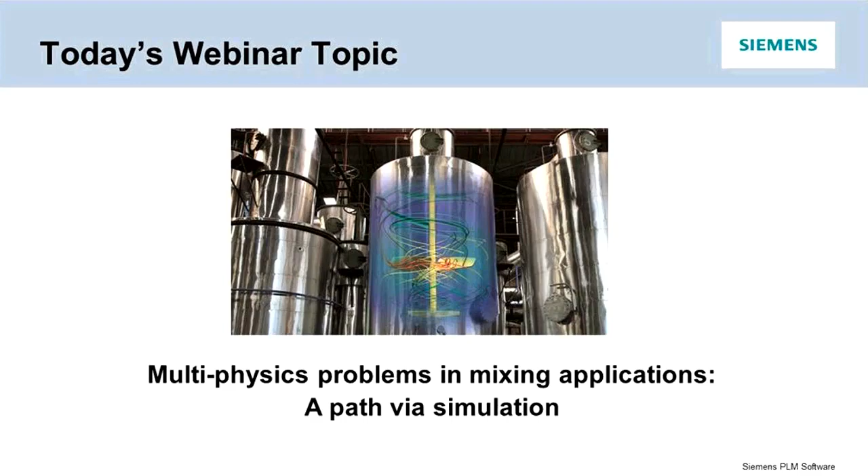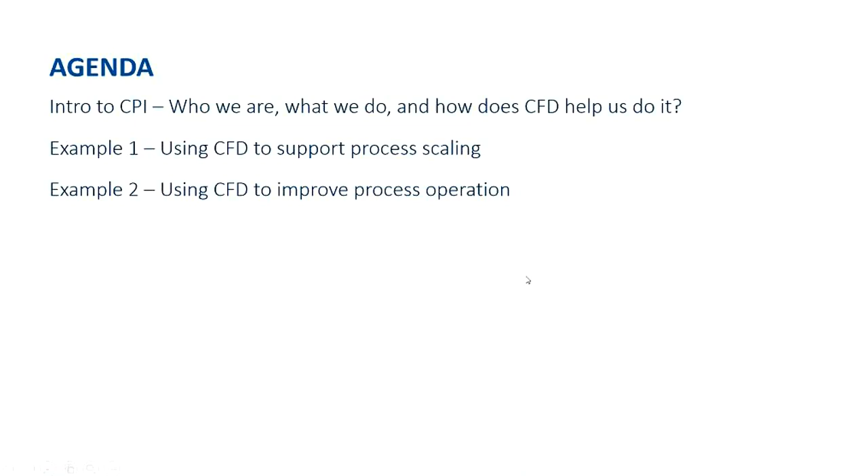I'm going to give you a quick rundown today of essentially how we use CFD to support process development and scale up. So just a bit of a quick agenda: I'll start off with a quick introduction to CPI, who we are, what we do, to give some context to the examples that follow, and then there will be two examples. So, who are CPI?

We are an independent, open access technology innovation centre. We were set up by the UK government around 14 years ago to help companies scale up and develop their new and novel processes. So we sit in this space between invention and industry, and we basically exist to help people bridge that gap.

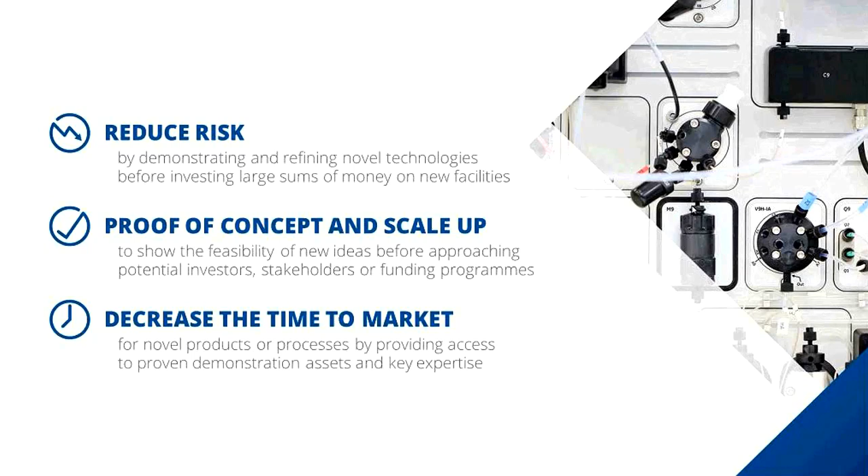So how do we do that? We have a variety of experienced scientists and engineers who've spent years and years scaling up processes. We also have a whole load of pilot and demonstration scale assets as well. What a lot of companies find is that some outrageously large percentage of good ideas tend to die in the scale up phase, purely for financial reasons, for lack of the ability to get hold of the kind of scale of assets you need to prove a process. That's where we come in.

We have four national centres: the Printable Electronics Centre, the Industrial Biotechnology Centre, which is where I work, Biologics Manufacturing, and the National Formulation Centre. Each of these was set up to assist the development of a particular industry within the UK.

So in terms of specifically CFD at CPI, how do we use it, what do we do with it? Mostly for us, it's about generally getting a better understanding of what's going on inside our vessels. That can be in the form of troubleshooting, when something isn't behaving quite as it should. You can't necessarily figure out why just by looking at single point instruments or through sight glasses. What CFD helps us with is seeing in much greater detail what's going on inside our vessels, to help narrow down what the issue might be.

Process characterization and optimization as well - for an existing process, how can we make it better within the limitations of an existing piece of kit? Process scaling is one of the examples I'll give a little later on. That's one of the main things we do: essentially trying to move people's processes from laboratory scale, in a flask of one litre or less, up through to an industrially relevant scale. So how can we use CFD to support that by better understanding the performance limitations that come with scale, and then design and operational guidance as well, and virtual prototyping.

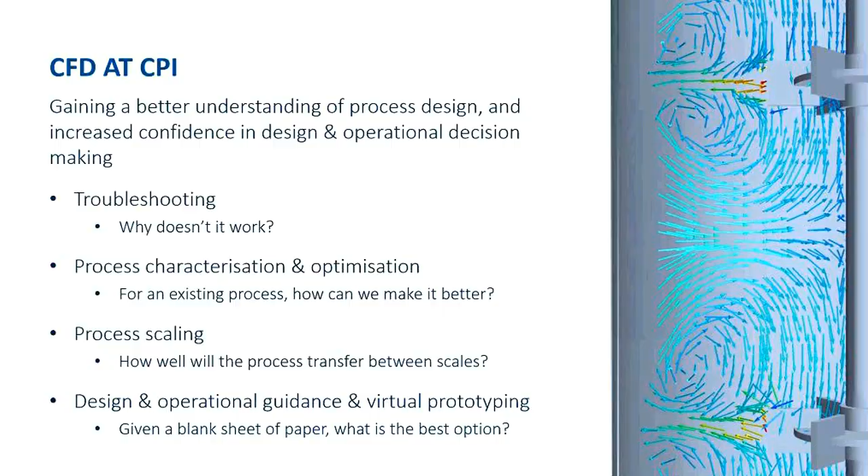Okay, so the first example I'll go into here is about using CFD to support scale up and also scale down. I'll just introduce that concept of scale down, because it's a big part of how we operate here.

We have a variety of assets, as I mentioned earlier on, from milliliter scale fermenters right through up to 10,000 litre scale. And what we need to do is to help our customers understand the limitations of the larger scale operation, without actually having the cost of running at large scale.

So what we try and do there is to find ways to operate small scale vessels in a way which mimics the performance of large scale vessels and the limitations of large scale vessels. So we can help companies to do all of their risky experimentation at small scale cheaply, but in a way which is relevant to large scale.

One of the main issues we come across time and again is people bringing in processes which have been developed in the lab using lab scale fermenters which are running flat out, which is just unfortunately not representative of larger scale operation.

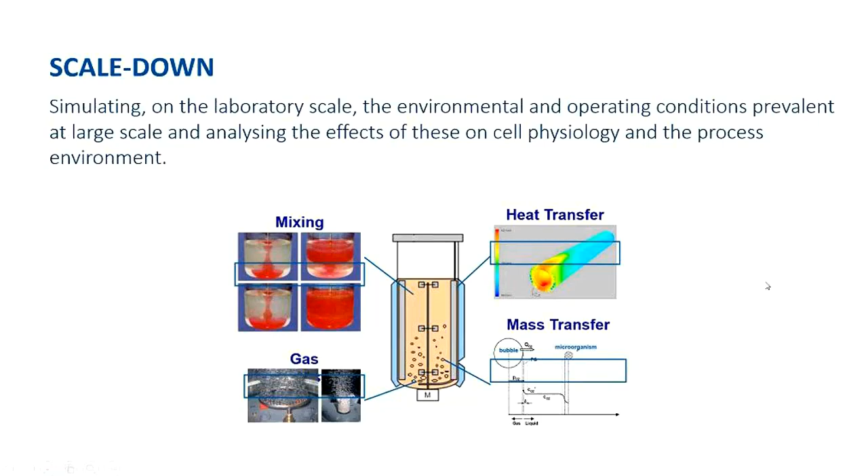Okay, so just to introduce the concept of using CFD to assist with process scaling, I'll use a very simple generic example to start with. So if you're designing a stirred tank reactor on paper, there are a variety of traditional rules which you would use when it comes to either the physical design of your vessel, or the operation as well. For example, with your physical design, your impeller should be 1/3 of your tank diameter. You should have 4 baffles, and they should all be 10% of your tank diameter.

Things like this, and the same comes to your operation as well. I've just listed a few here. To match mixing performance, you should match the impeller tip speed. To match solids distribution performance, you match energy input, and so on. These are well-established rules which have been used for years and years, and people tend to trust them.

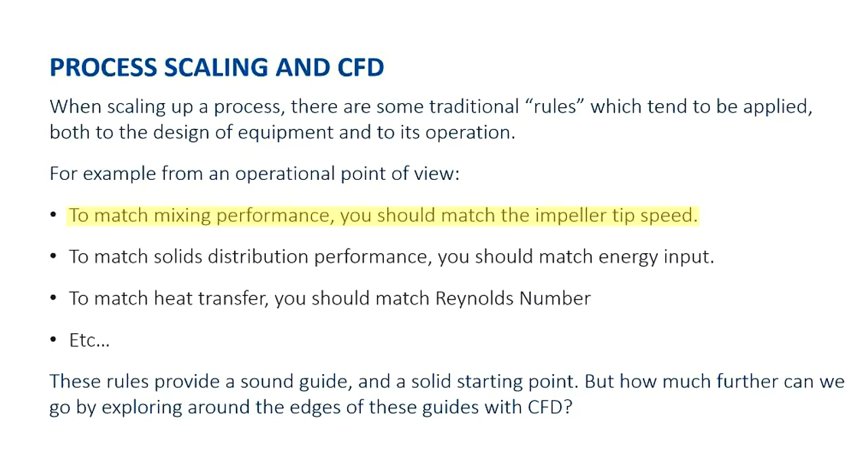But what we'll do here is a little exercise in using CFD to check these rules, but also to see how much further we can go just by exploring around the edges. What I'll pick on here is one particular example: to match mixing performance, you should match the impeller tip speed. I've got a very simple example here where I have two vessels which have been perfectly geometrically scaled. Essentially, I've just taken a 500 ml vessel and stretched it in all dimensions equally to make it 5 litres.

At the start of the video here, both vessels are stirring at 500 RPM. You can see we've got the turbulence profile shown on both of them. What I'll do is gradually increase the speed on the right-hand side until the turbulence profiles are the same. That, in theory, according to those rules, should be at the same tip speed. And what we'll find is, when we get up to speed, we are around about the same tip speed, but not exactly the same.

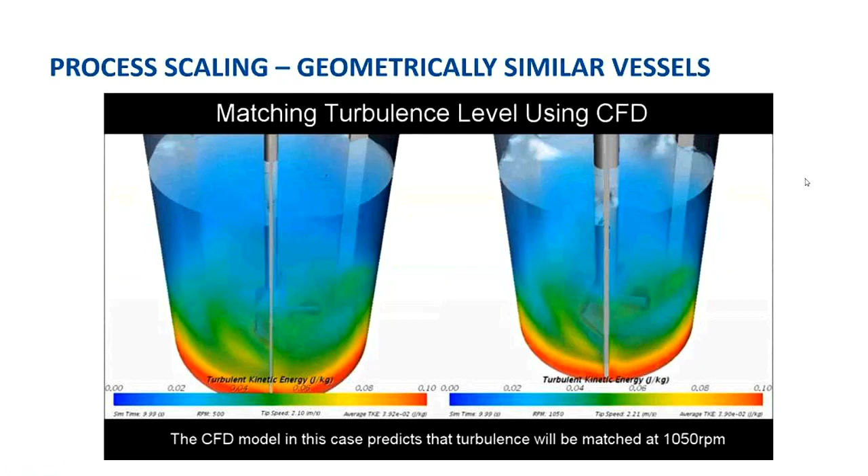So what this shows is that the model is generally in agreement with these traditional rules which everyone's trusted forever. However, what it is showing is that in the smaller vessel we need to go slightly beyond the same tip speed in order to get exactly the same turbulence profile. So that's all well and good, but how often do you have places which have perfectly geometrically scaled vessels? We find that's quite rare.

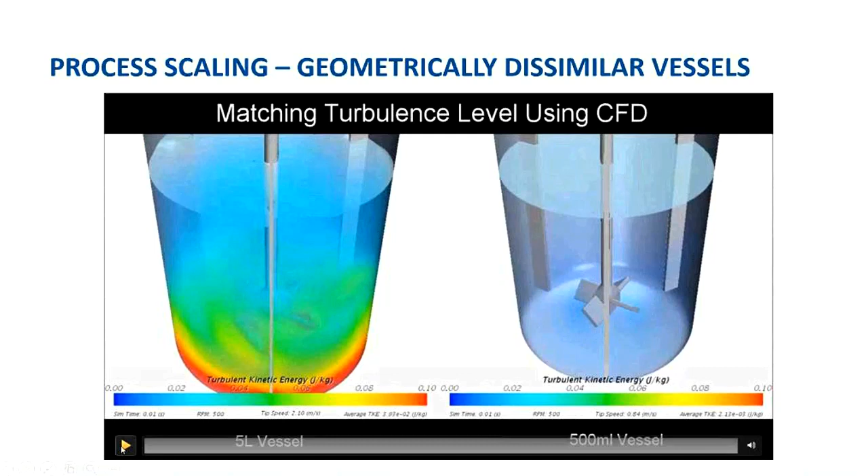What we end up with normally is people who have a research lab with a variety of different vessels in there. So here is the same example again, except on the right hand side we've got a disproportionately small impeller. If we do the same exercise again, speeding up the agitation on the right hand side until we have as close as possible the same turbulence profile, what you see is, because they are not perfectly geometrically scaled, these rules just go out the window, and we need to go way beyond the same tip speed in order to get the same turbulence and the same mixing performance.

And for us, this is where CFD comes in really handy, particularly when it comes to comparing our small-scale vessels against a customer's small-scale vessels to try and mimic the performance that they were getting in their labs, in our labs, as we transfer the process in.

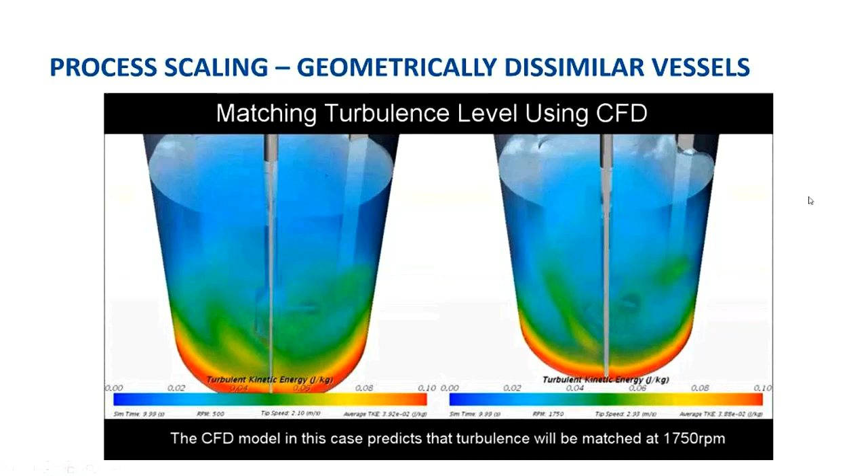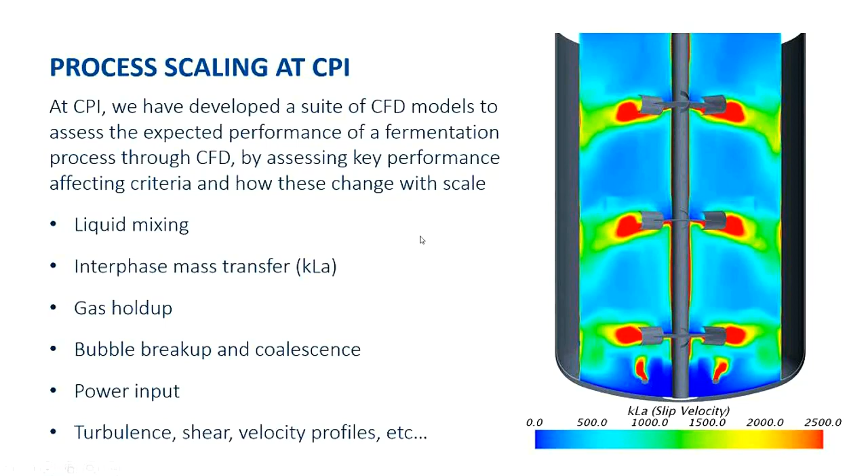So how does this apply to, how have we generally applied this approach here at CPI? Over the last 6-12 months or so, we've developed a suite of CFD models looking at the performance of all the different scales of fermenters we have here, from the point of view of various key performance criteria that come with fermentation processes, so liquid mixing, KLA and mass transfer, gas holdup, bubble size, and so on.

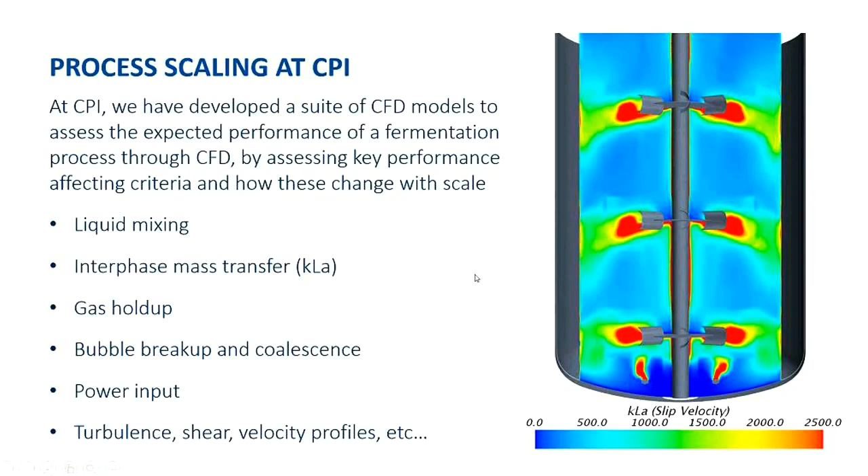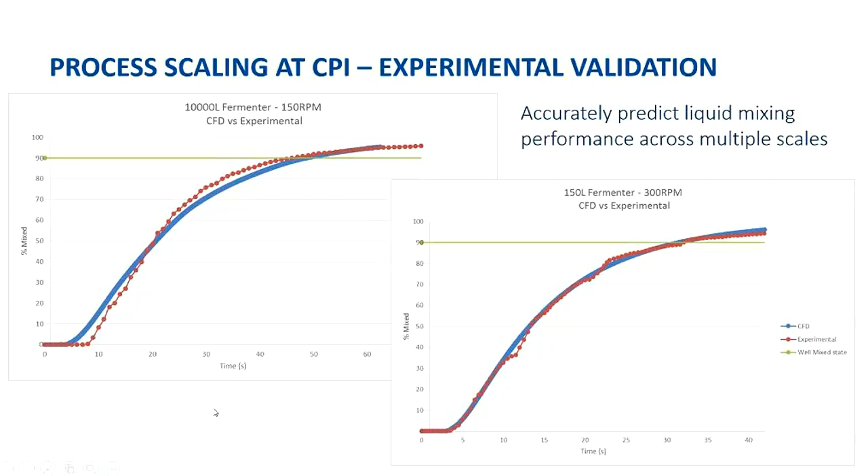So we can do all of our experiments at 10 litre scale, where it's relatively cheap on materials and labour and things like this, get a really good understanding of how the process is going to work, optimise the process at that scale, and then in theory just scale it straight up to 10,000 litre scale and it'll just work.

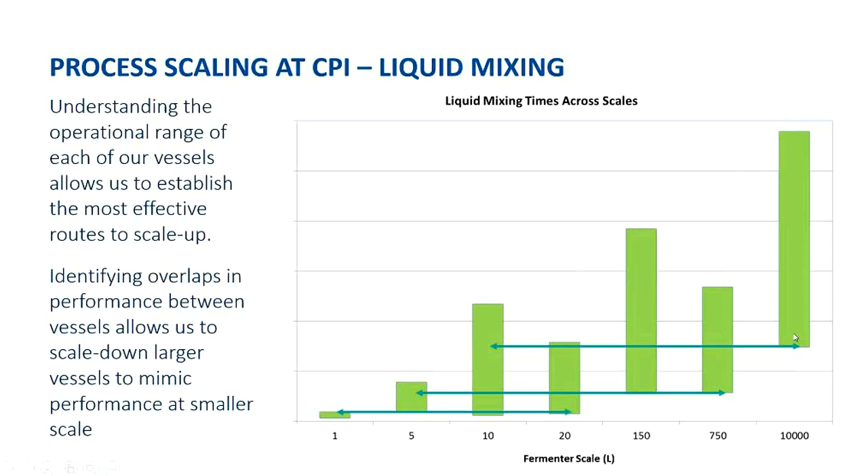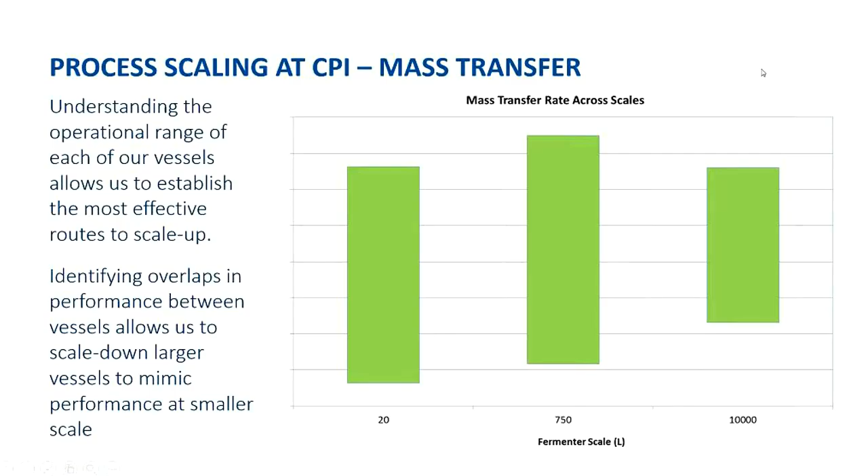The same applies to KLA and mass transfer rates, same kind of exercise. So that was just a brief introduction to scaling processes and how we can use CFD to support that. What we've got here as well is an example around getting the best out of a single piece of equipment. This is about how to wrap our heads around the limitations of operating at very large scale.

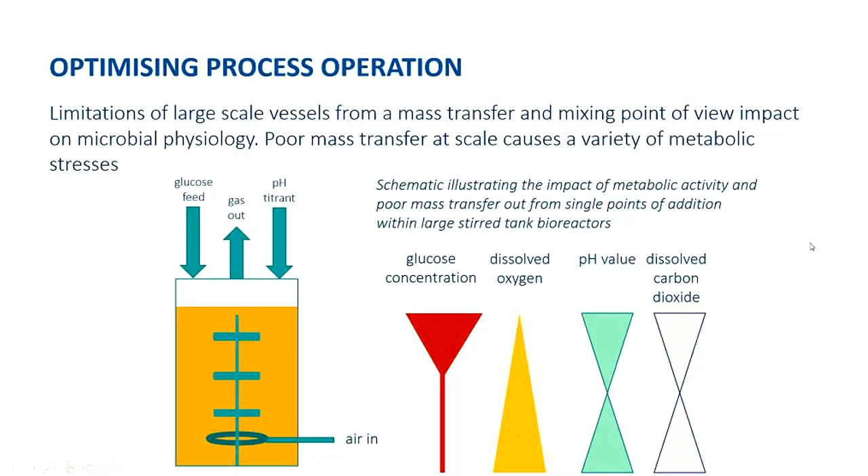So what we wanted to know is, we wanted to have a look at our larger scale vessel and really understand what is the best way we can operate this to get the most possible mixing performance out of it.

So what we did here is a series of mixing time models, with a tracer added in at the liquid surface at different levels, and we monitored the concentration profile of that and the uniformity of that over time in various different mixing zones.

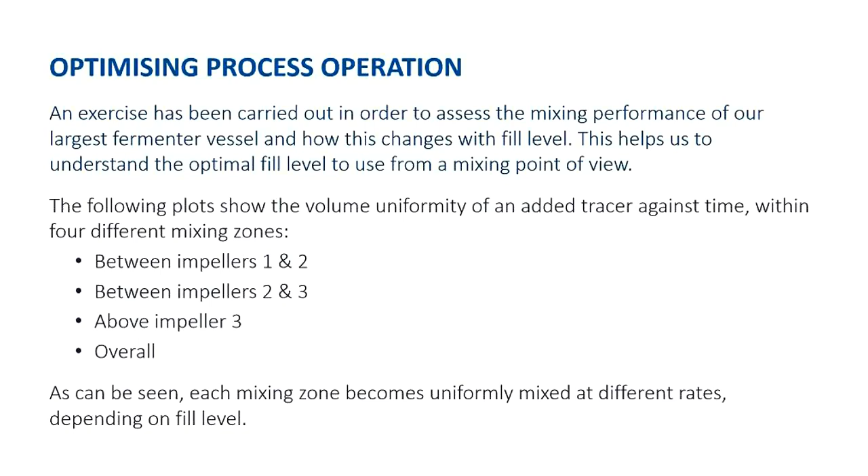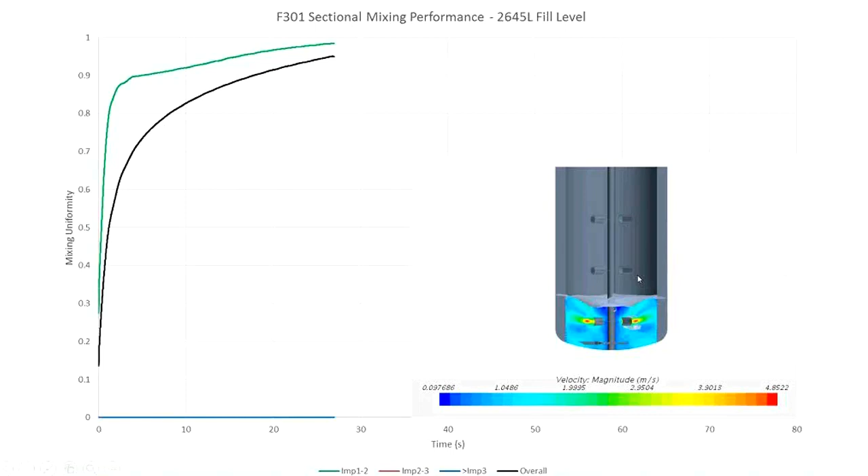We saw some quite interesting results from this. This is a similar plot to what I'd shown before, which is the mixing uniformity, or volume uniformity, of the concentration of the tracer over time in various different mixing zones - between the first and second impellers, between the second and third impellers, above the third impeller, and then overall throughout the full vessel. We see some quite interesting things here. This is a liquid level roughly in the middle of the first and second impellers. If we fill the level a little higher, what you'd expect is there's more fluid, so it will take longer to mix, but what we actually see is it takes less time to mix.

This would be quite difficult to explain without the CFD model behind it. If we look at these plots here, we have a nice recirculation pattern generated here, but if we pull the level back down again, we actually don't get this recirculation pattern. So what happens here is in between the impellers, at a larger fill volume, we actually have a better mixing performance.

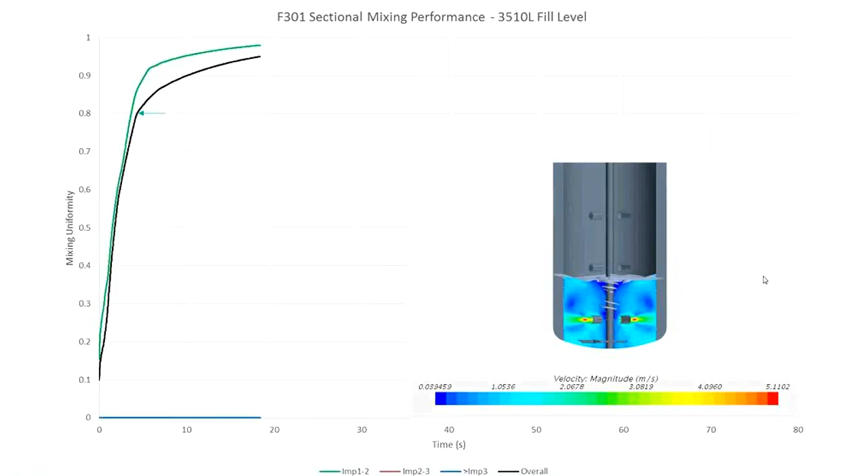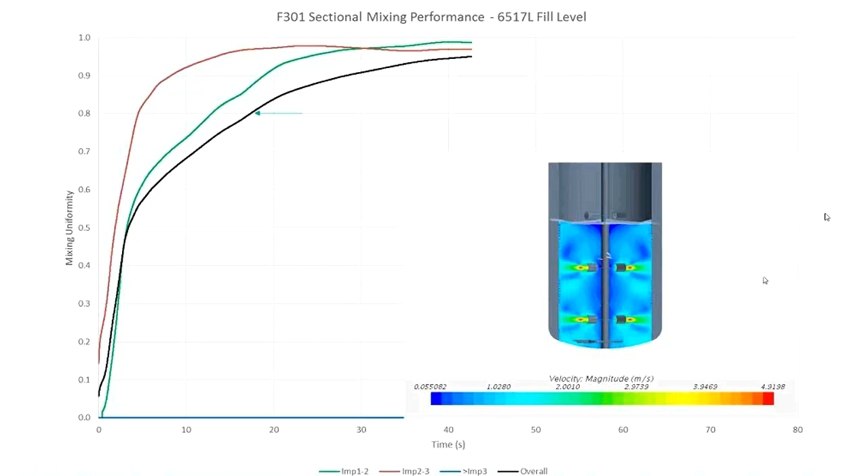If we fill up further and introduce the next mixing zone, you can see the time extends out, as you would expect, as we brought another zone into play. But then again, the same applies if we increase the level within that zone. It actually pulls the mixing performance back again, because we have an opportunity to create a nice recirculation pattern there. And then again, as you'd expect, as we go up to the top, we see everything go out again because we're introducing another mixing zone.

What we see here though is actually the mixing performance within each of the three zones, which would be very difficult to measure without the use of CFD. We see here that the top zone mixes quite quickly, and the second and third zones mix at essentially the same rate, just offset by a period of time, which would be the time it takes for the fluid to actually make its way down there.

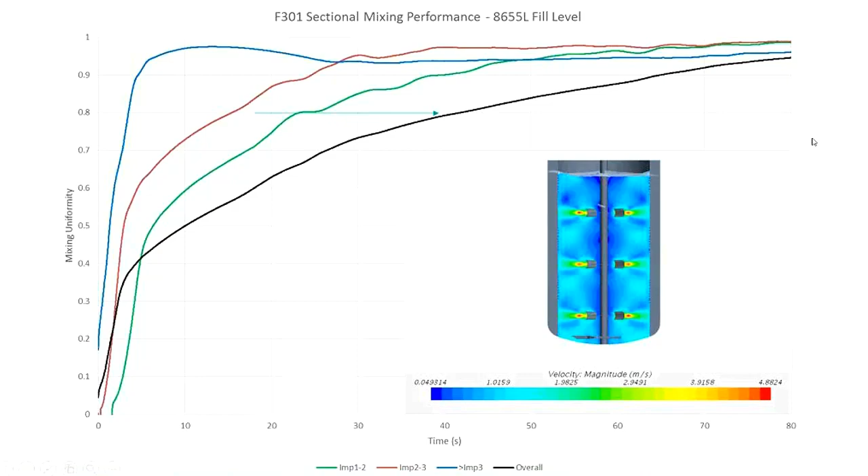Okay, I think there we go. We got there in the end. Okay, so basically that was it. Just a couple of introductions, a couple of examples of how we use CFD to support what we do here at CPI, and that's me.

So yeah, also a warm welcome from my side, and I would like to start with a summary of some trends we see in the chemical and process industry based on our interaction with our clients.

First of all, there is a need to improve the performance, mainly with a goal to increase the throughput. Secondly, we see a trend to more flexibility. This can be either with respect to the feedstock for a certain process. So if you think, for example, we see a certain transition from carbon-based chemistry to green chemistry. But it can also be with respect to material variability, which means that smaller batches are needed to produce more customized products.

And this often takes place in the same reactor. And finally, and this is probably always true, we want to reduce costs by, for example, reducing the power consumption for a certain process, or by doing fewer expensive tests, or indirectly by reducing the time to market.

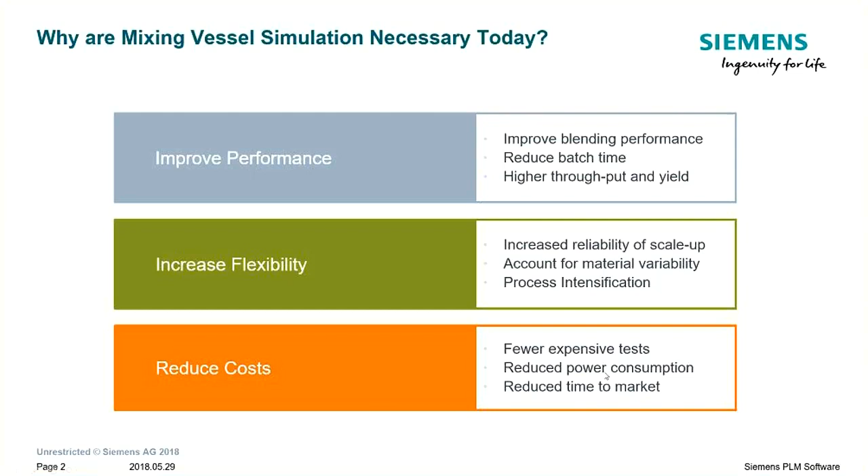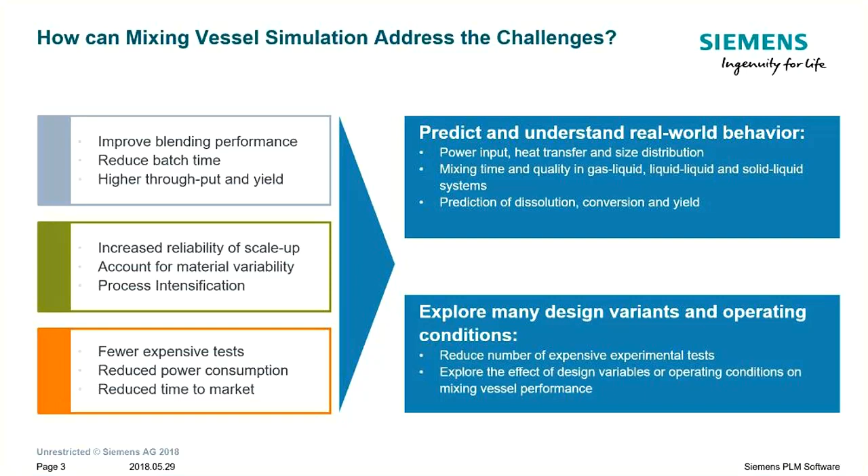And for all these trends, we believe that CFD simulation may help to achieve the goals by either helping to predict and understand the reactor behavior, and or by finding better designs or operating conditions for a certain process, and therefore creating engineering innovations and business value.

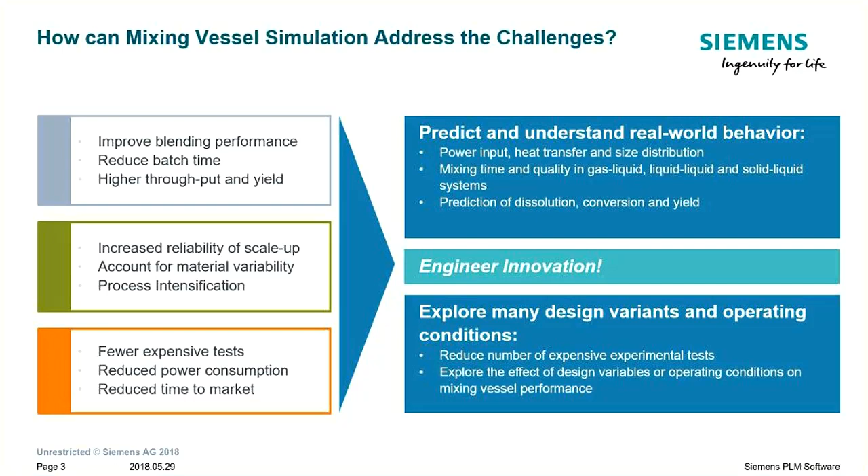But obviously, to use CFD successfully and efficiently, some key requirements must be fulfilled. And first of all, we need the ability to import CAD models from external sources, or we should be able to create them within a tool.

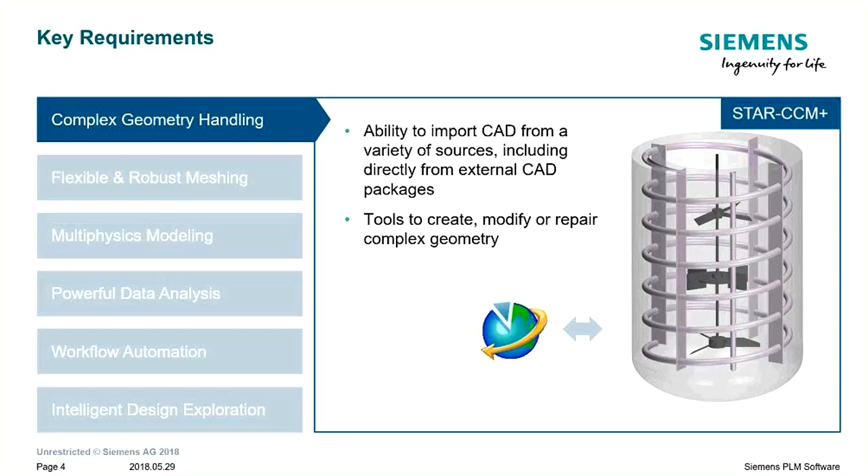Secondly, robust meshing is needed to capture complex geometry and also resolve areas where we expect large gradients, like for example here around the impellers, and also special areas of interest need to be resolved appropriately. This means that we need easy control of local mesh refinement.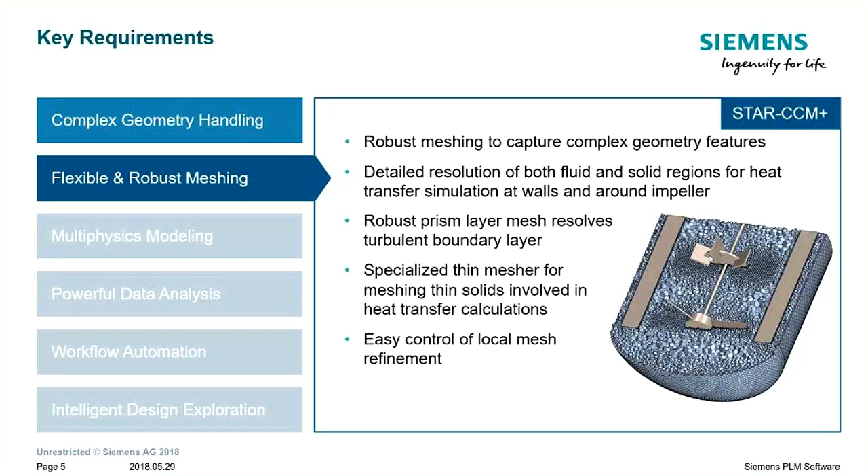Then obviously for the simulation, suitable and validated models for all relevant physics should be available. And this is even more important, I believe, if you think about the time it typically takes to implement and test a new model into an existing code. This can often not be done within one or two days, and it typically consumes really a lot of time.

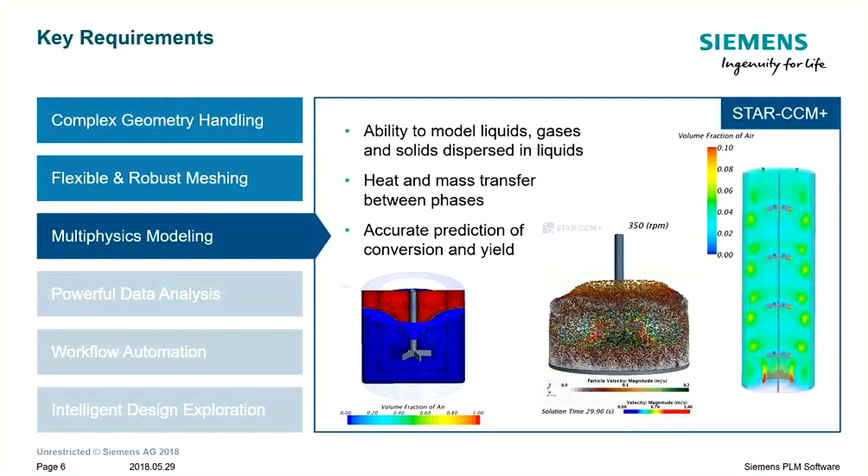And then we need also powerful data analysis, not only for visualizing the simulation results, but also for quantifying parameters and understanding the complex dependencies. And I will show you in a few slides some examples on that.

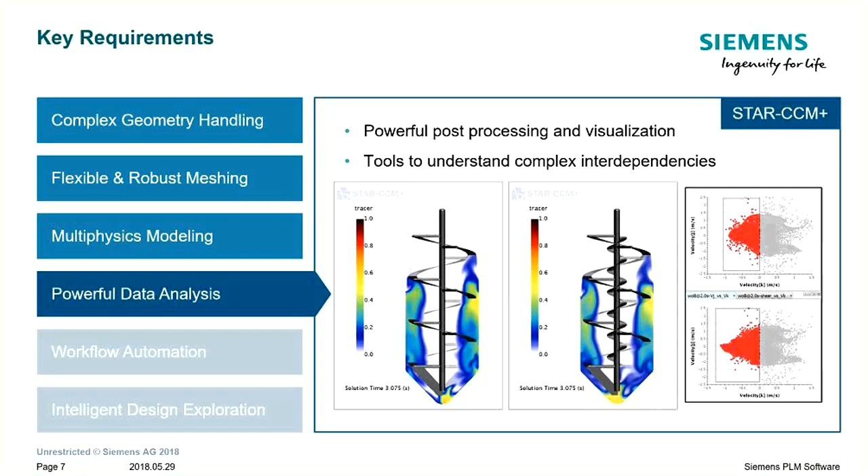And finally, especially if you think about repeating work, a certain degree of workflow automation is extremely helpful for efficient simulations. And STAR-CCM+ offers this already with its pipelined and adaptable workflow.

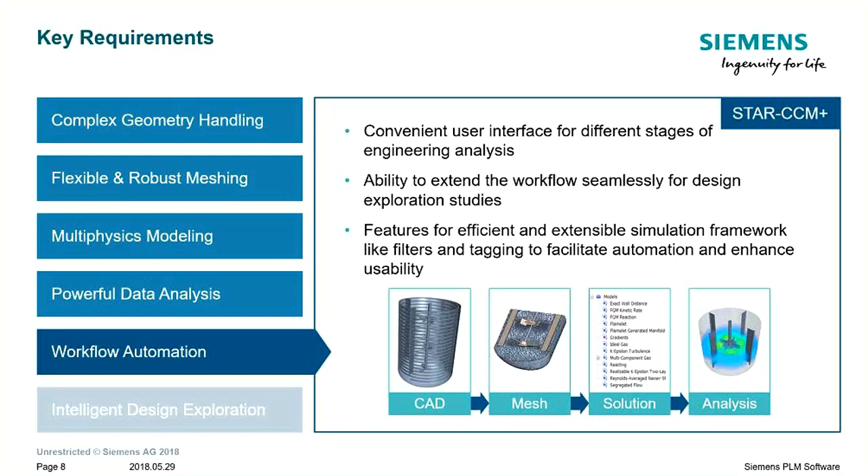But we are also offering Admixtus, and Admixtus is an add-on to STAR-CCM+. Admixtus is designed to guide the user in a step-by-step way through the complete setup of mixing vessel simulation.

This includes the CAD creation, where the user can select and customize different vessel types, impellers, baffles, and internals from an internal library. It helps for the mesh and physics setup based on best practices.

This means the meshing process automatically includes certain refinement levels around the impeller, around the baffles, at the cooling or heating walls or internals. And finally, Admixtus also offers a broad variety of typically used parameters, reports, and scenes, so they can easily just be selected, and then everything else is done in the background.

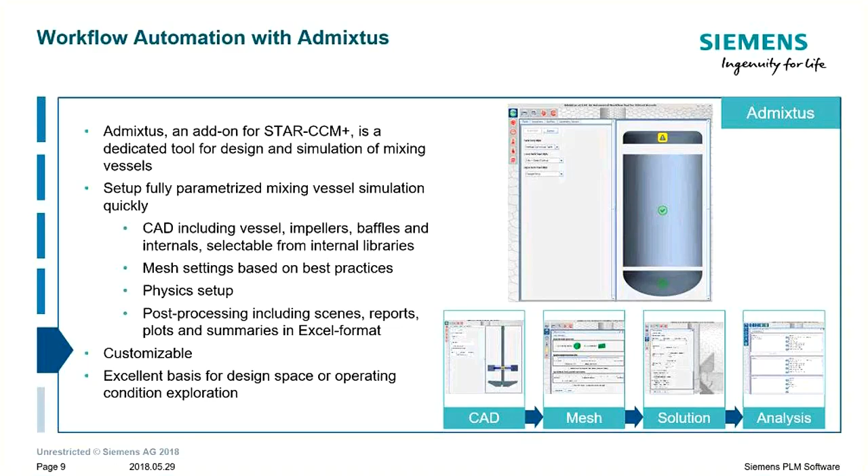And with that tool, with Admixtus, you're really enabled to set up a mixing vessel simulation within minutes. And since it is fully parameterized, it can also serve as a starting point for a design space or operating condition exploration with the built-in design manager in STAR-CCM+.

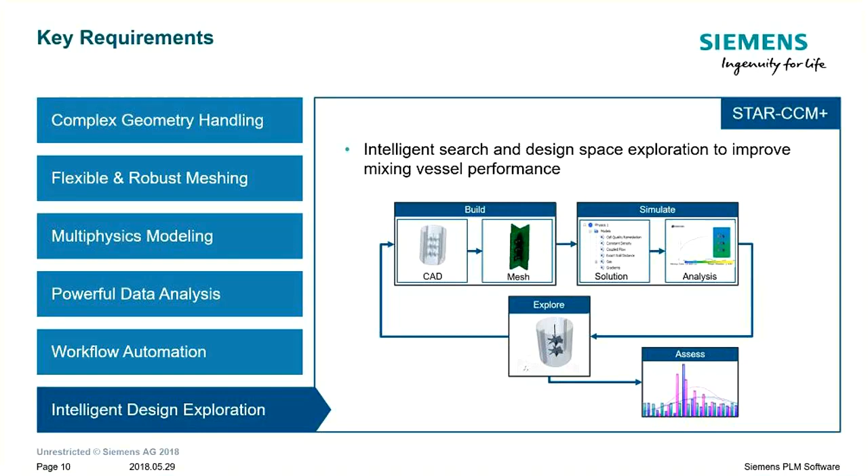So I can summarize that STAR-CCM+ fulfills all these requirements to predict, understand, and improve design variants and operating conditions efficiently.

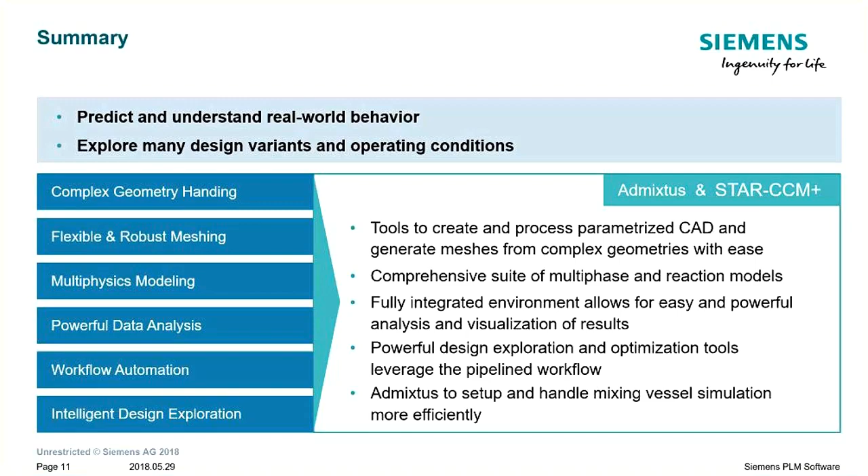Okay, so this was a pretty general introduction. Now I want to get more specific, starting with a simulation of solid suspension cases. The first example deals with impeller power input for different solid loadings in a mixing vessel with a pitch blade turbine.

The case was simulated using the Eulerian multiphase model with a granular flow extension to account for particle-particle interaction. The advantage of the Eulerian multiphase simulation is that it solves only one full set of Navier-Stokes equations per phase, coupled via the volume fraction and exchange source terms. This makes it well suited for cases with a large amount of solid particles.

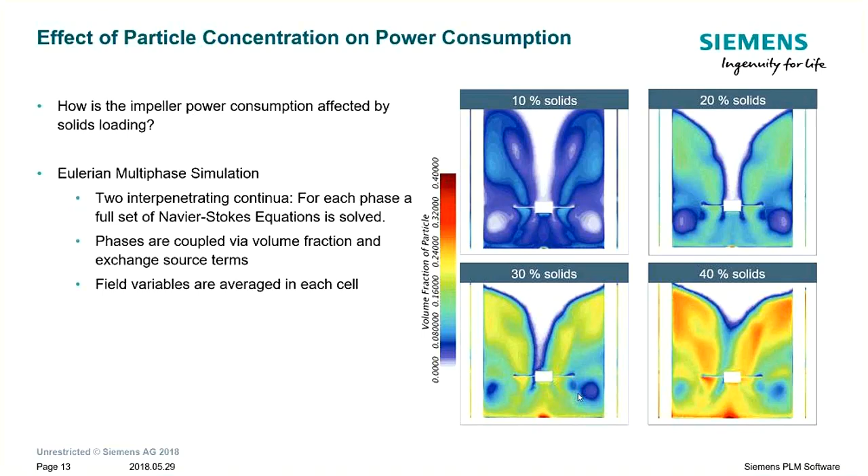On the right-hand side, you can see a snapshot of the solid distribution in a cross-section for different solid loadings. The simulations were always run with the same impeller speed.

Now if we look at the power consumption, we see in the experiments a nonlinear increase in power consumption versus solid loading, although the typical correlation predicts that power consumption is a linear function of solid loading. With Star-CCM+ and our simulation, we are also able to capture this nonlinear behavior, meaning the non-uniform distribution of solid particles in the tank leads to this nonlinear behavior, and this can be predicted with simulation. But it's hard to incorporate this into a correlation.

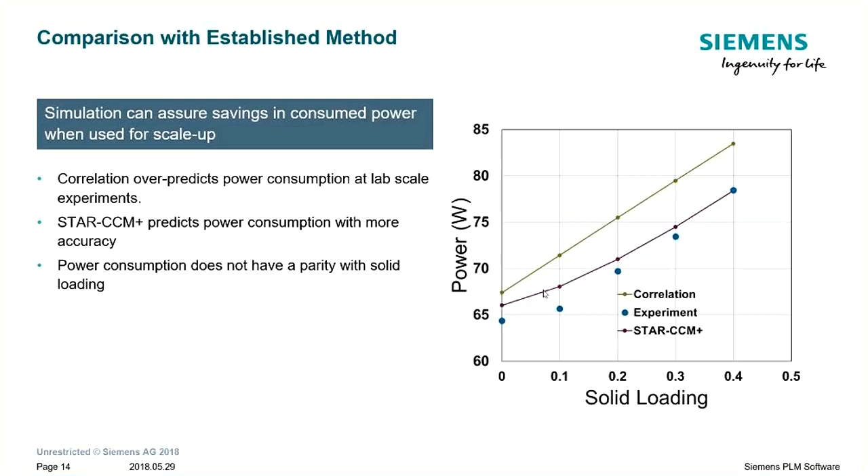But what if we are interested in the individual particles? Star-CCM+ offers the discrete element method, where we resolve all the particles, including particle-wall collisions, friction, and their effect on the background fluid. This gives us a very detailed model for analyzing solid suspension.

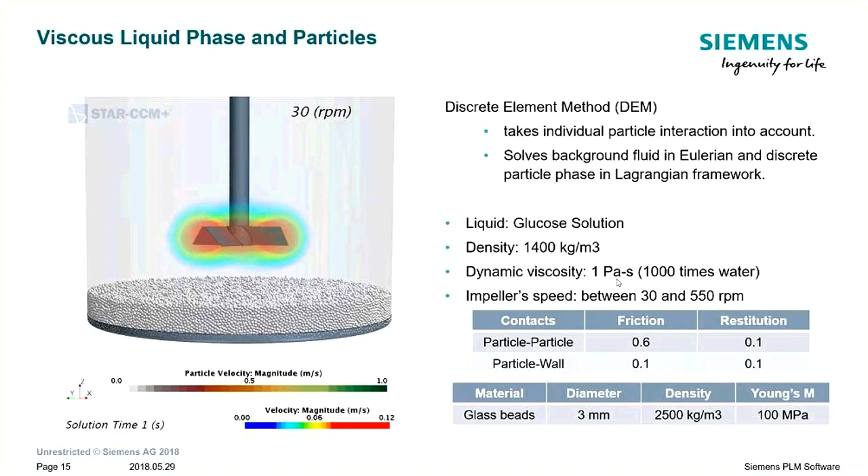In this case, we look at the amount of suspended particles for different impeller frequencies in a highly viscous liquid, with a dynamic viscosity around 1 Pascal-second, meaning laminar flow. Here you see for 3 different impeller speeds the suspension state: on the left only a few particles are lifted, in the middle some more, and on the right a lot of particles are suspended.

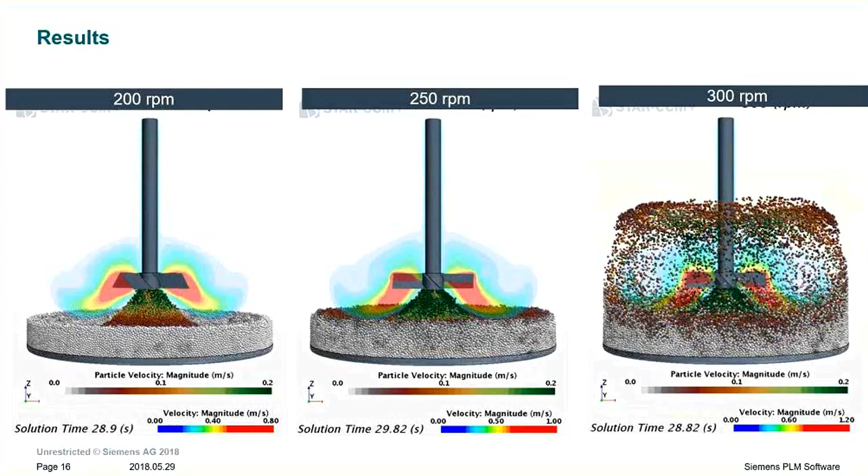If we look at some quantitative results, basically the amount of solid suspended versus impeller frequency on the right-hand side, we see reasonably good agreement between experiments and numerical simulation, especially with respect to the frequency range where we see the transition from the settled to the suspended state. This is pretty well predicted.

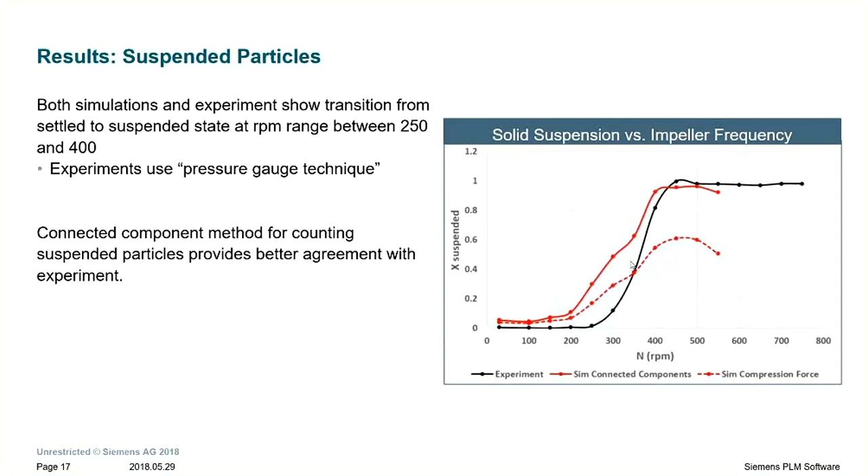This predictive capability is even more important since, at least not to my knowledge, there is no correlation in open literature available to predict solid suspension states in the laminar flow regime.

The next topic I'd like to talk about is heat transfer, and I'd like to start with a kind of thought experiment. Assume we have a reactor where a chemical reaction occurs. First we have to mix two components, and due to the chemical reaction, heating or cooling is also required.

We did some experiments in the lab and want to scale it up. What does that mean? The heat of reaction scales with the volume, while the cooling or heating area only scales with the area, and this discrepancy could lead to issues.

Typically this means we need additional cooling capacity, for example more windings of the cooling or heating coils, which can affect the flow, and the flow can again affect the mixing and finally the mixing performance. So we have a strong dependency on several aspects, and with CFD we can easily investigate different design variants and how they affect reactor performance.

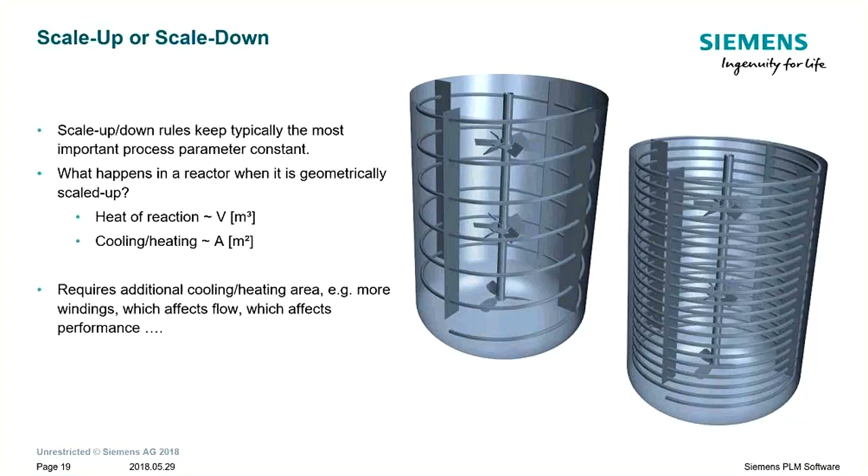Together with the Hochschule Sachsen-Anhalt in Germany, we are currently looking into a heated mixing vessel with a cooling jacket. What they found is that, depending on the inlet and outlet position and angle, they see completely different cooling and heating behavior. This is something they would like to understand better.

In addition, they are thinking about investigating whether the impeller Reynolds number is really the best choice for use in heat transfer correlations at the outer wall. But mainly we are looking at the cooling here.

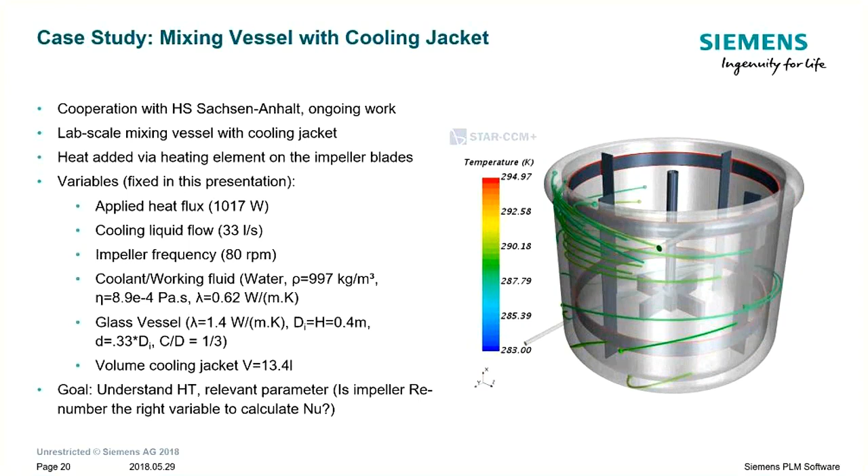This means basically the resolution of the boundary layer as well as of the glass wall. We need an accurate boundary layer to calculate the heat transfer correctly. For the thin glass wall, it's slightly different - here we are dealing more with the number of cells generated. If we apply a polyhedron cell here, typically we end up with a huge number of cells, which is not necessary. But Star-CCM+ offers also the thin mesher, which is able to generate in thin areas, so in small gaps, a suitable mesh without too many cells. This is really beneficial for this kind of application.

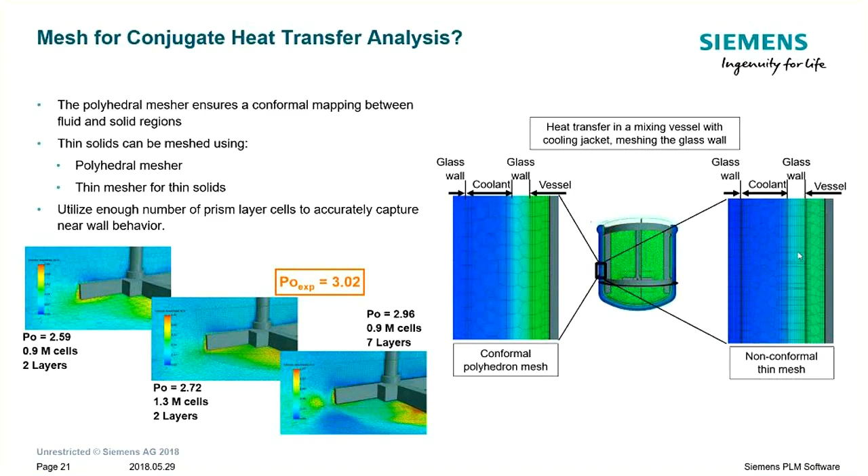So, then some results, some preliminary results. First of all, in this mixing vessel, the heating elements are applied directly on the impeller blades.

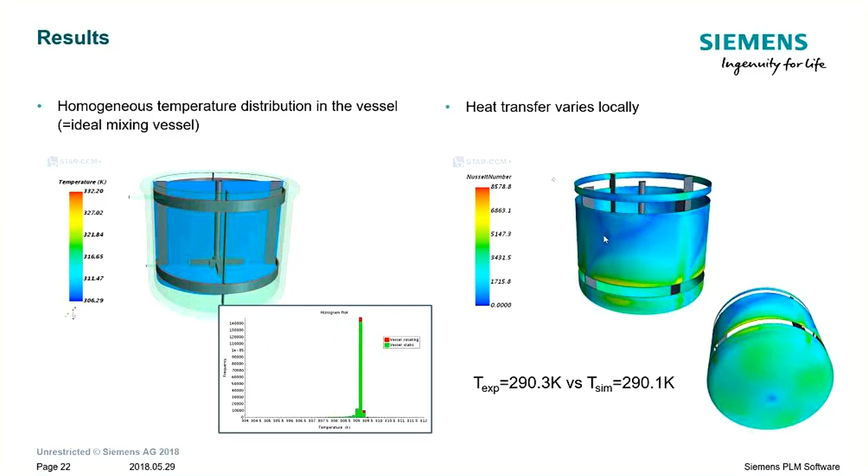Another class of problems is the interaction between the fluid flow and the structure itself. So structure in this case means the baffles, the impellers, all internals. In most cases, in mixing vessels, the one-way coupled problems are sufficient. Basically we have some fluid loads acting on the internals, on the impellers, and the structure itself affects the fluid flow not significantly. In most cases, it's negligible.

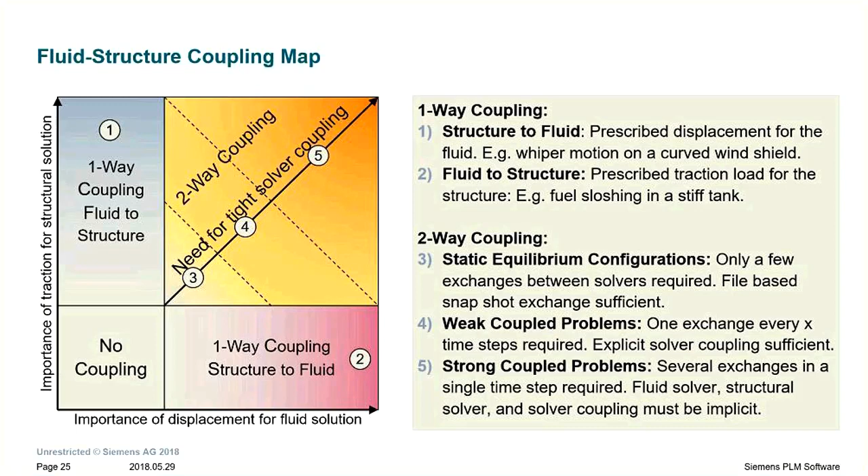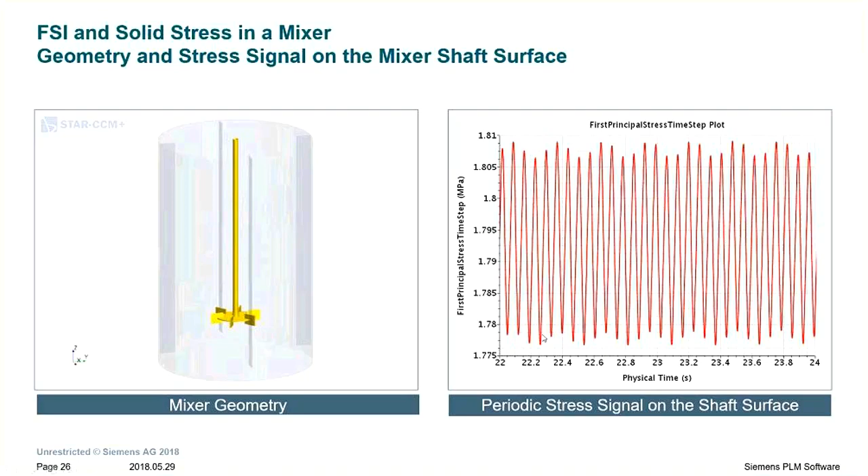In this study, we were looking at the solid stress on the mixer shaft in a baffled tank. We have 4 baffles and a Rushton turbine with 6 blades. The final outcome is basically a very regular periodic stress signal. If we do a fast Fourier transformation, then we see that we have a perfect match between the stress frequency and the blade-to-baffle passing frequency.

So the results themselves are as expected. Also, especially for this specific case, the stress level is pretty low, so that we can assume that fatigue on the shaft is not to be expected.

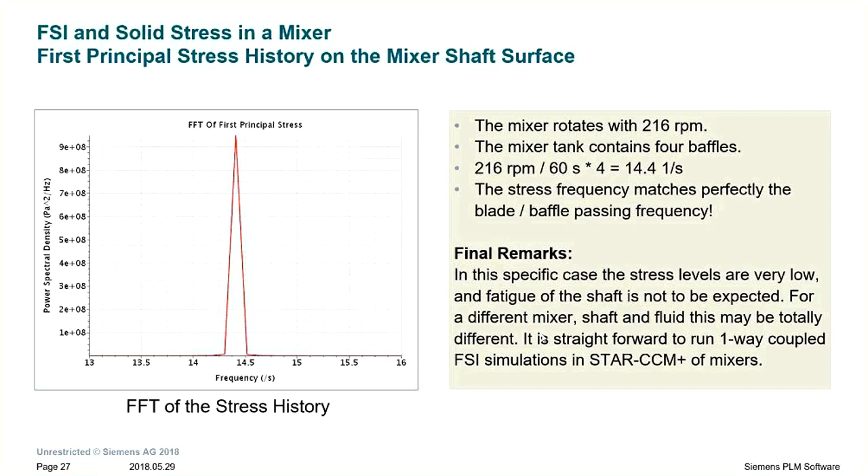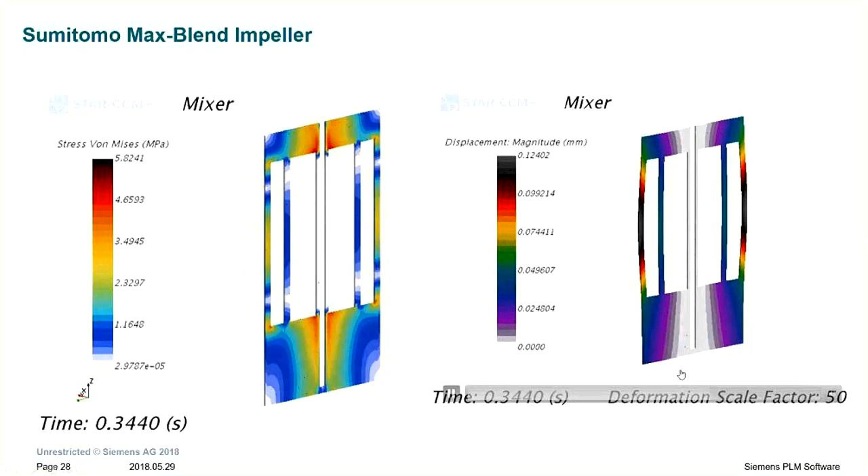But obviously, we can also use our built-in morpher to basically modify the impeller so that the stress acting on the impeller leads to a certain displacement, and this can be considered. Even in that case where we have pretty strong forces acting on the impeller, we still need a deformation scale factor of 50 to make it visible that the blades are really deformed. So typically one can assume that incorporating the changes of the geometry is not necessary in mixing vessel simulation, also not in that case.

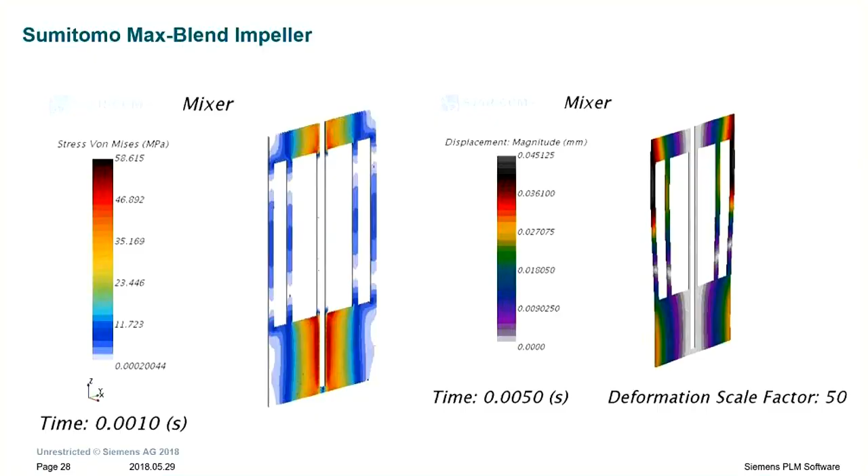Obviously, to be predictive, we have to capture the fluid dynamics, and fluid dynamics in this case means multi-phase fluid dynamics. We need to capture the flow field correctly, the gas hold-up. We often have to deal in fermentation reactors with non-Newtonian liquids. Then obviously there is mass transfer from the gas bubbles to the liquid. This mass transfer has to be modeled, and it is a function of the interfacial area, and especially in full scale tanks, the size distribution has to be considered, which includes coalescence and breakup, so the change of the sizes.

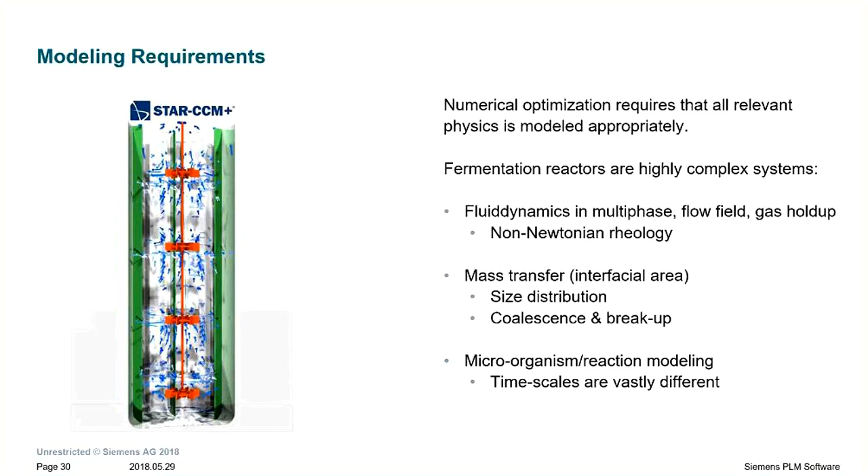In addition to that, we have some microorganisms in the tank, and the microorganisms are responsible for certain reactions. They have to be modeled, and here we are facing another challenge, since typically the timescales are vastly different. If you think about the fluid flow, this maybe takes some seconds, or as Alex said before, maybe some minutes until everything is distributed. But the reaction part typically takes days, sometimes weeks, or even months - think about wastewater treatment plants, for example. So we have a broad variety of issues to deal with.

I would quickly highlight one aspect, and this is the simulation of the size distribution.

In the optimization or operating condition exploration, which I'll show in a few slides, we were using the Eulerian multiphase model.

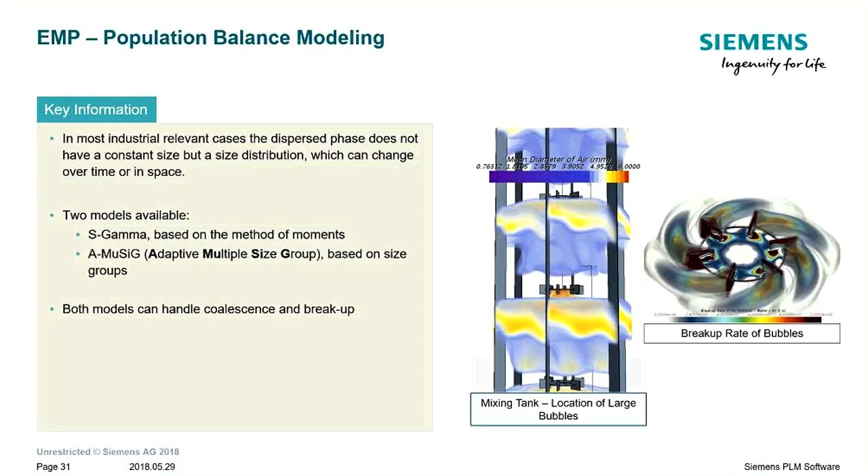There are two models available to include population balances in the Eulerian multiphase model: the S-gamma model and the adaptive MUSIG model. The S-gamma model is a very efficient method to include size distribution, because we are only solving transport equations for two additional parameters.

These two parameters are the zeroth and the second moment. But since it's very efficient, it also has some drawbacks.

One drawback is that it assumes the size distribution shape has to follow a log-normal distribution. In a lot of real-world applications this assumption holds, but obviously not in all.

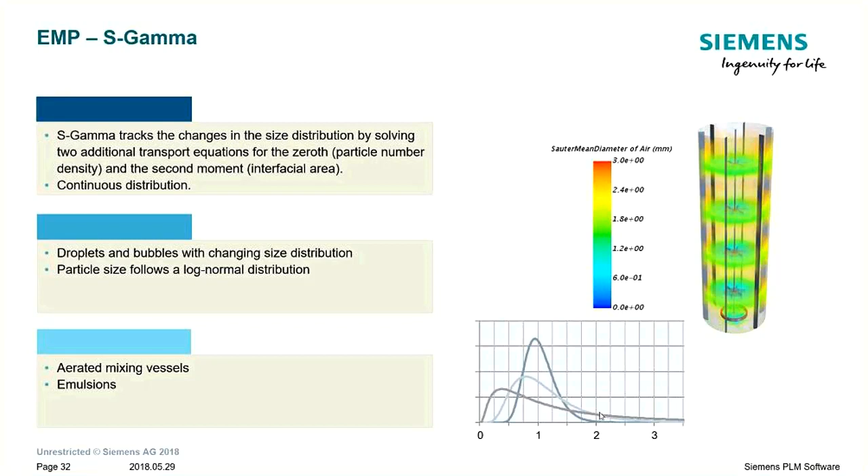For these cases, we have recently implemented the adaptive MUSIG model. This is an extension of the classical MUSIG model, which divides a certain size distribution into a certain number of groups.

For each of these groups, a set of transport equations is solved. You can imagine that if you solve each of these size groups in every cell, it's a large computational overhead, especially in areas where you have only large bubbles.

Then you still have to solve for the small ones, and in areas where you have small bubbles, you still have to solve for the large bubbles, which is not very effective. The adaptive MUSIG model adjusts the size distribution in each cell.

So we see a dynamic shift of the size groups over the whole geometry, and with that we are able to capture the size distribution with significantly fewer classes, which makes the simulation much more effective.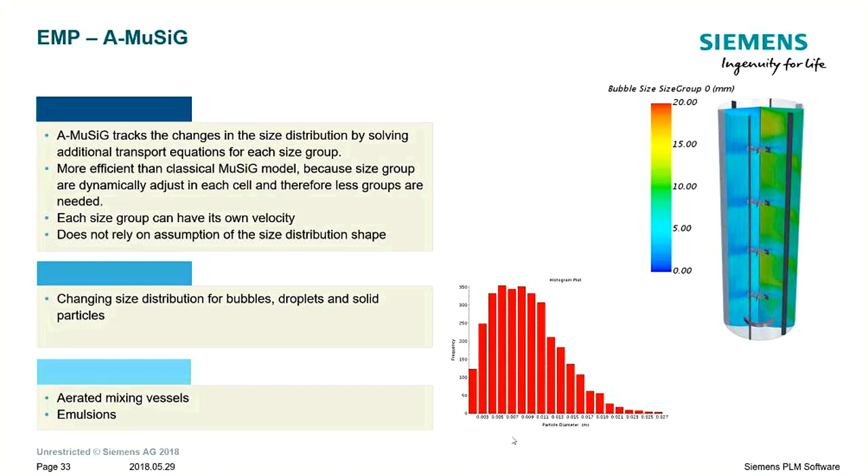Okay, so now back to the operating condition exploration. Our goal is basically to minimize the power consumption, and since the variables we are varying are the Sparger volume flow and the rotational speed,

we are considering for the total power consumption the compressor power as well as the impeller power. And our goal is to maximize the volume-averaged dissolved oxygen.

In addition, because most of the microorganisms are stress sensitive, we want to keep the local stress below a certain value so that the microorganisms are not damaged.

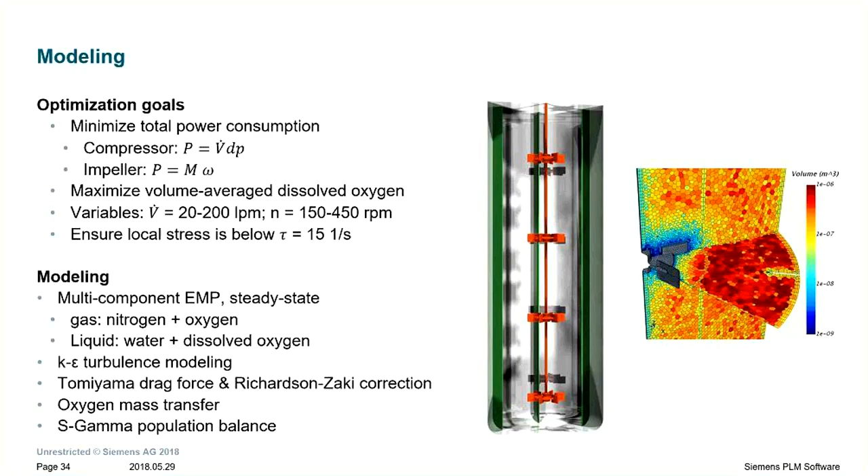With that, we ran this operating condition exploration in STAR-CCM+ with a Design Manager, running in total 164 different simulations, each taking between 10 and 30 minutes depending on the boundary condition.

So this study can be done over the weekend, for example, depending on cluster sizes. Now on this plot, each of these circles represents one design.

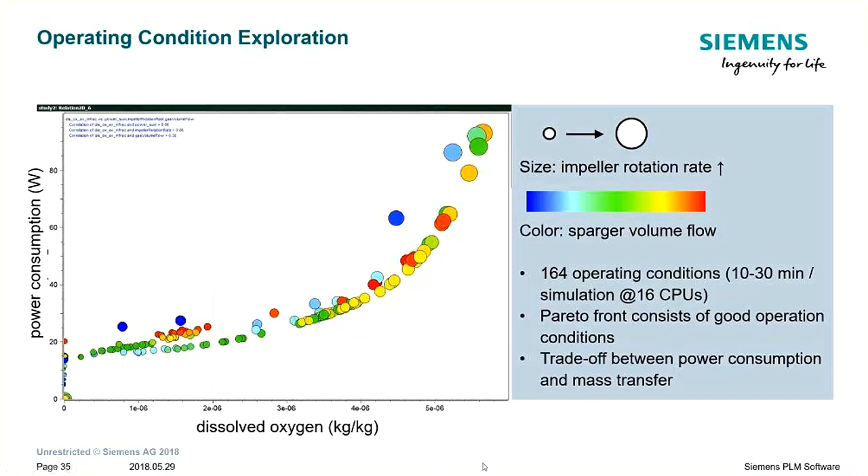The larger the circle, the higher the impeller rotation rate, and the color indicates the Sparger volume flow. Based on this map, we can remove all designs where the strain rate is too high, at least locally, where we can assume the microorganisms get destroyed.

We can also remove some designs on the left-hand side, where the mass transfer of oxygen from the gas bubbles to the liquid is too low, because we assumed microorganisms consume a constant amount of oxygen.

But all designs in the white area are valid designs, and we can now pick the design which best fits our requirements.

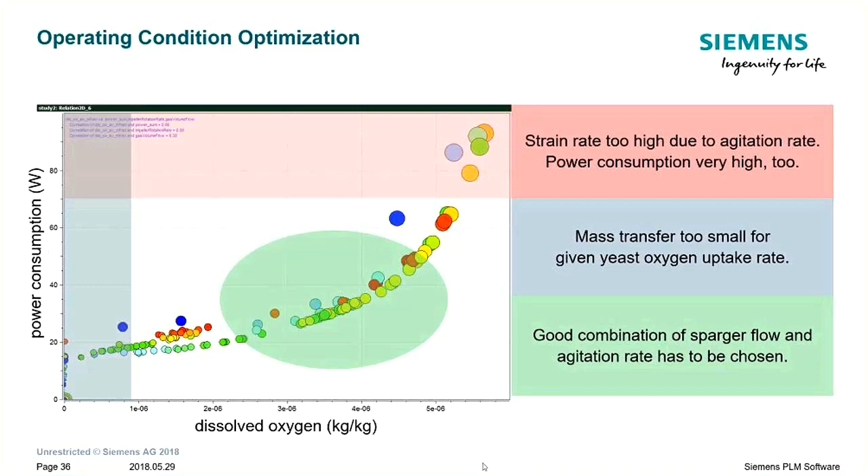And with that we can reduce the power consumption, giving us different strategies to optimize our reactor.

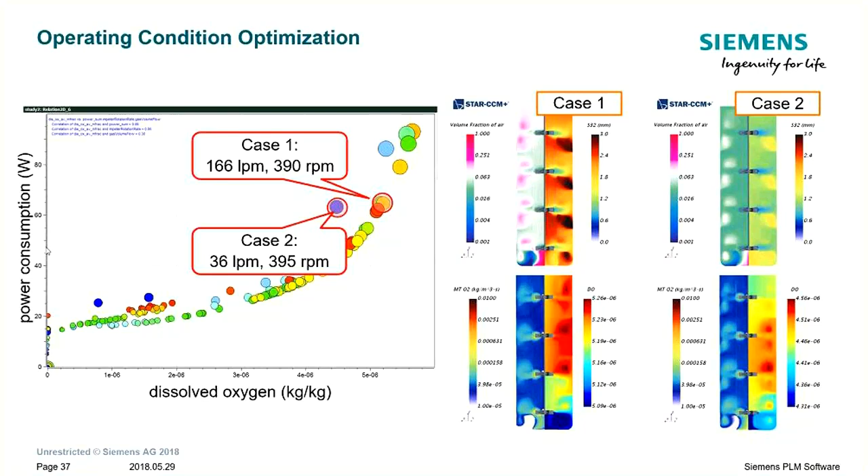And with that, I'm done, and I'm looking forward to answering your questions if you have any.